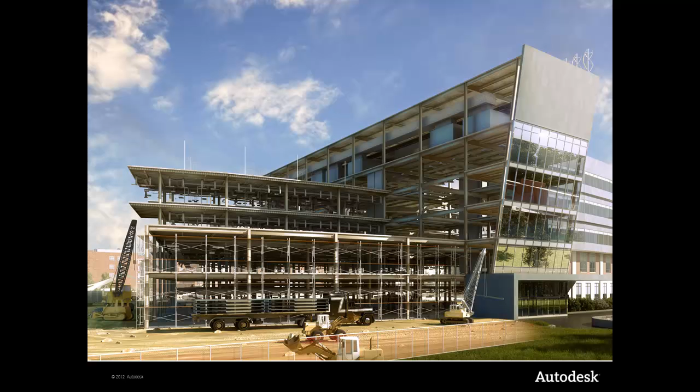I am pleased to bring you a brief demonstration of the Autodesk Construction Solution Constructability Modeling Workflow.

Let's begin with a close look at the components of the constructability modeling workflow. When we as construction professionals are given project information, it is often in a state that is difficult to use immediately for our construction needs.

If models are provided, they often lack detail or are built strictly for the purpose of communicating design intent, and therefore need to be augmented to fit our needs.

We will begin by acquiring our design intent models that will be used as a backdrop for our constructability modeling. We can then review the models in several ways, the first being with Buzzsaw and the ability to interactively view the models right on the web.

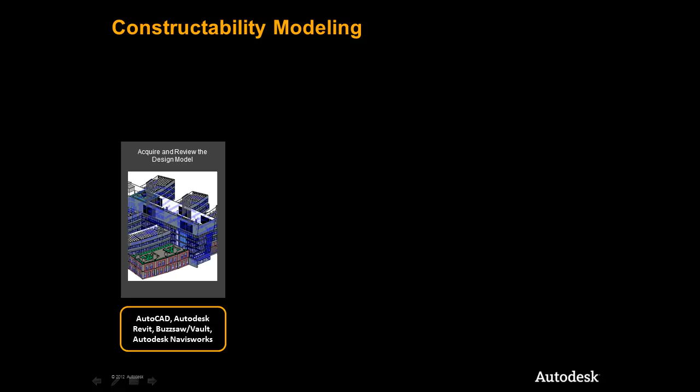Next, we'll open the models in Autodesk Navisworks and Autodesk Revit to continue to interrogate the information provided and begin our planning for constructability. Next, we'll look into how to leverage Autodesk Revit to create the construction detail needed within the models.

We will explore efficient ways to reference the design models as a backdrop and create the parts and assemblies needed to add the construction-specific details.

Following on that, we'll look at ways to prepare the design and construction models for downstream uses and begin to move the data into Autodesk Navisworks for aggregation and management.

We will finalize this workflow by preparing the data and models in our Navisworks environment for later uses, specifically coordination, scheduling, and logistical planning.

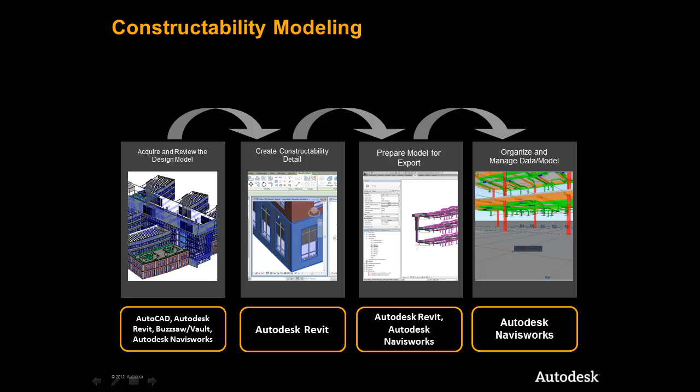It is important to note that the Autodesk Construction Solution ties directly into a data management and collaboration solution that empowers firms like yours to manage, share, and securely collaborate with all project stakeholders, both inside and outside your firewall.

As we see in this graphic, the Autodesk Data Management and Collaboration Solution is a connector that links the workflow components together, enabling project information to be shared at any stage of the process.

When working with building information models, it's important to gain insight into the design as soon as possible. By leveraging the design intent models, we can make planning and pre-construction decisions early, aligning our construction modeling efforts for downstream uses.

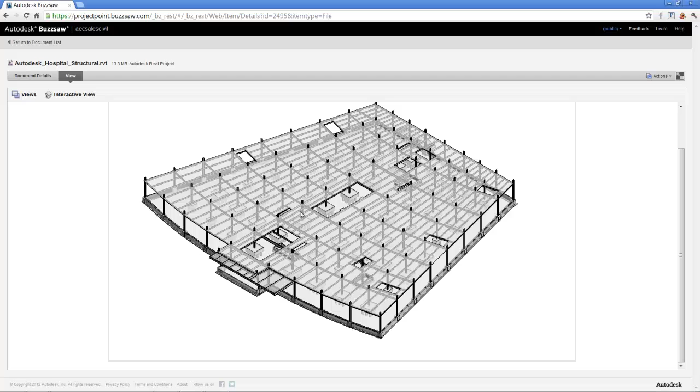Here we see that simply viewing the design information provided online in Buzzsaw, we can interact with the models and start the review process and get a solid understanding of what has been provided, even before we acquire the models and work with them locally.

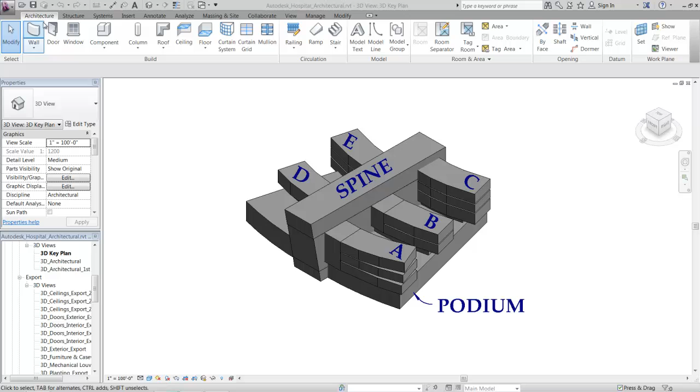Once we have the models we need, we can see that the architectural model has been organized in a way that lends itself to some natural work breakdowns.

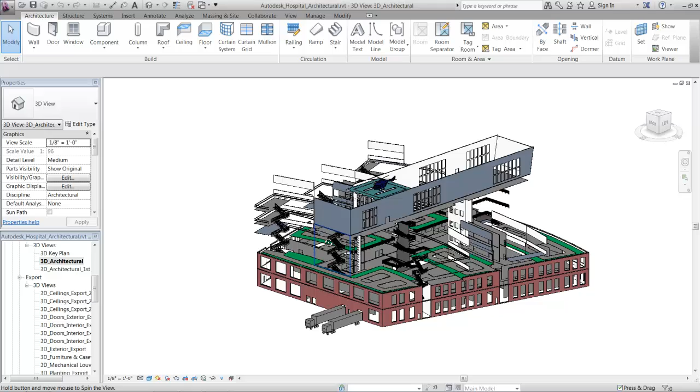We can leverage this spatial organization of the design model to help inform how to break apart and organize our constructability model moving ahead. Constructability modeling refers to the ability to derive new levels of information beyond what you would typically achieve with a design intent model.

Contractors often receive design intent models or simple documentation from the architects and engineers.

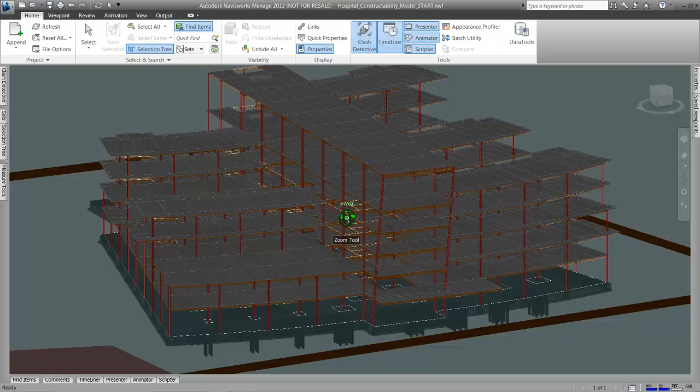However, in order to really have this information be useful and helpful in driving the construction practice, new levels of information have to be added to the process that account for needs and methods, materials, and how those project components come together. This is really the role that constructability plays.

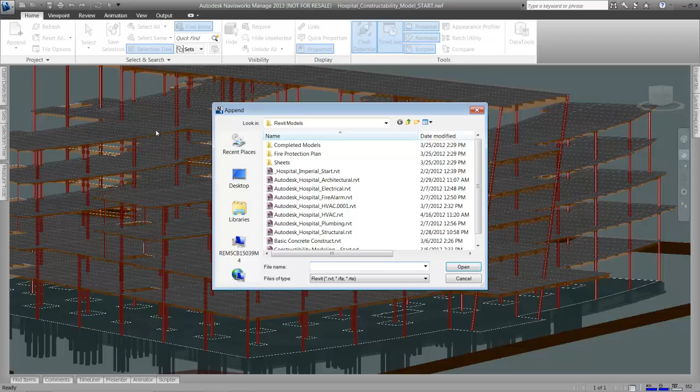We can see here that the design model specifically needs to be broken down to account for concrete pours in the slabs, as well as breaking down the walls so they can be sequenced and coordinated appropriately.

Traditional coordination and quantification techniques tend to be extremely manual, which can be time-consuming and prone to error. And project scheduling is traditionally performed in software that has no connection to the design beyond what is being manually entered by the planner.

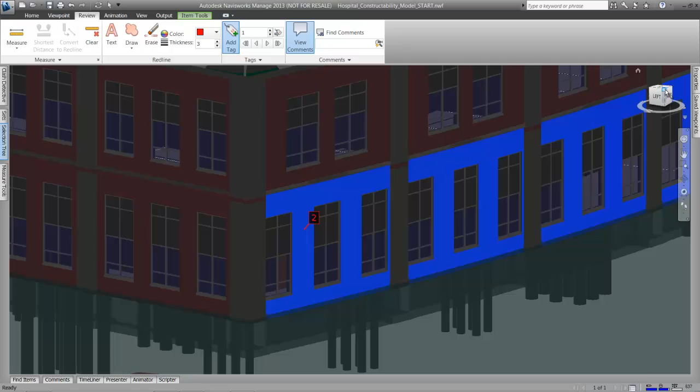With the Autodesk Construction Solution, BIM or VDC engineers, superintendents, and project engineers can adopt a digital approach that reinforces constructability, bringing their construction knowledge to the project earlier in the process.

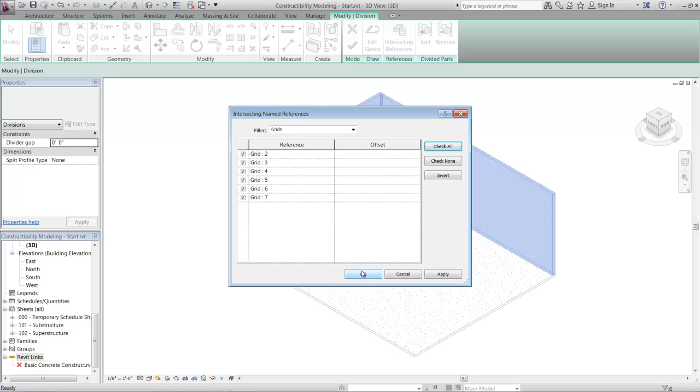Something that can limit the usefulness of a model is a lack of construction detail. Take this wall created by an architect.

In this example, the wall is modeled as a single object with property information describing the components it is comprised of. From an architect's perspective, a single object may be an adequate representation.

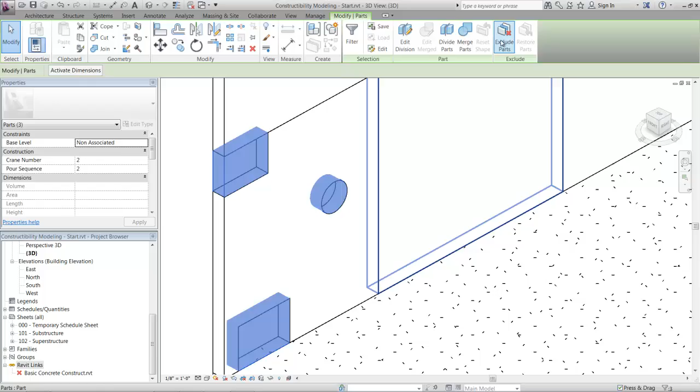However, for a contractor, you may need to understand and investigate the order in which each subassembly is built along with relevant impact on the surrounding trades or logistical equipment.

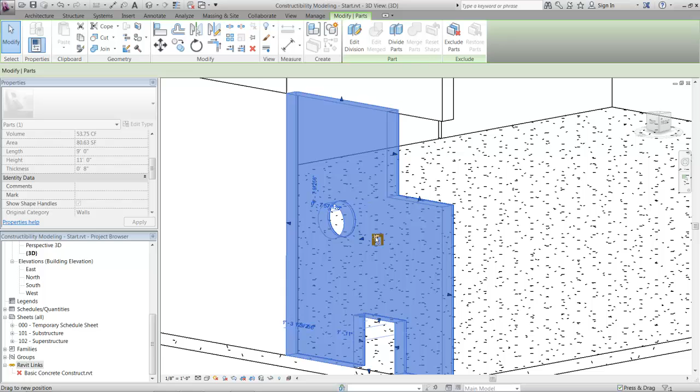Design intent models can be further modified, dividing slabs into individual concrete pours, breaking partitions to show accurate wall construction, or merging components together to better represent how the elements will be constructed in the field.

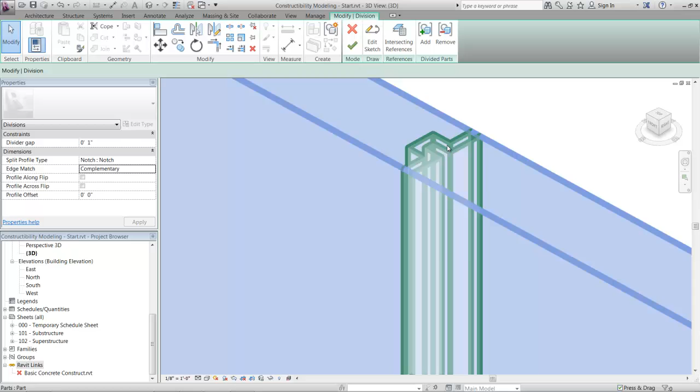Here we see a specific profile being added to the cast-in-place wall segment. This capability is important. We can account for details specific to how the wall will actually be constructed, in this case an expansion joint detail or a conduit chase.

Being able to add this detail to the models and being able to do it without editing the original design intent is an important benefit of leveraging the Autodesk construction solution that saves time and ensures accuracy in the field.

By driving this level of information into the process, you are better able to derive more granular insight into quantities, coordination efforts, and construction sequencing.

Better insight into how these components come together will help you plan how work is executed efficiently and improve visibility of production planning implications.

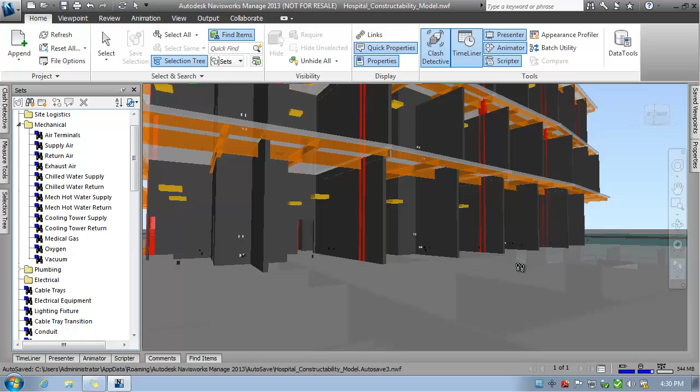Thinking about constructability early in the process really has a significant impact throughout the execution of the work, as you're able to explore various considerations before getting out into the field, resulting in better control of both cost and schedule.

The Autodesk construction solution delivers a higher level of detailed information, enabling more realistic simulations for improved analysis and shared understanding.